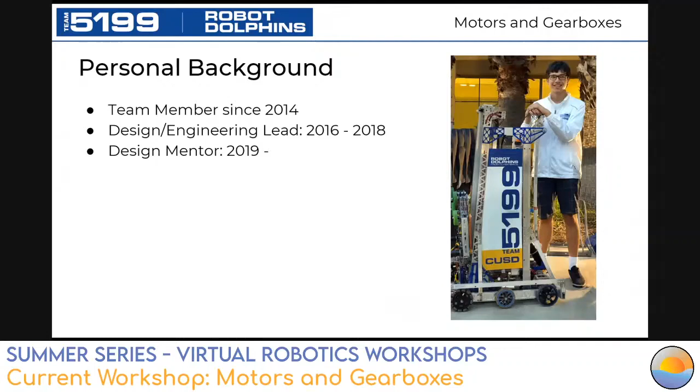I tend to do kind of a seat-of-the-pants design philosophy in a lot of ways, just because we have such a crunched design season. But this is just my perspective on the ways to design and spec your gear ratios and motors.

So I guess we'll get started with the basics, just to quickly make sure everyone's up to speed. I'll have questions at the end. I tend to move kind of fast, as you can already tell, but if you have any questions, please put them in chat, and I will try to address them as they come up, or at the end as well.

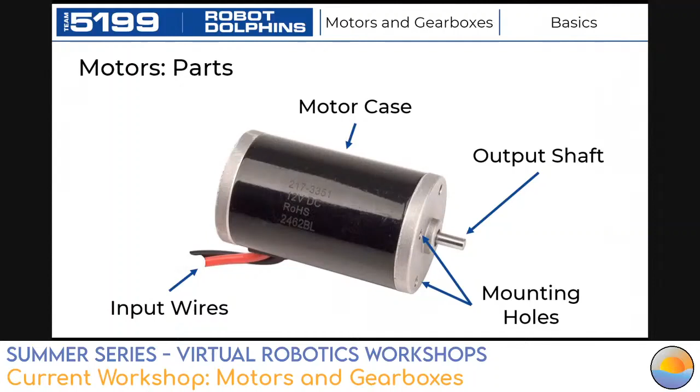So this is your basic motor. Input, you usually have about 2 input wires, your output shaft, and your mounting holes.

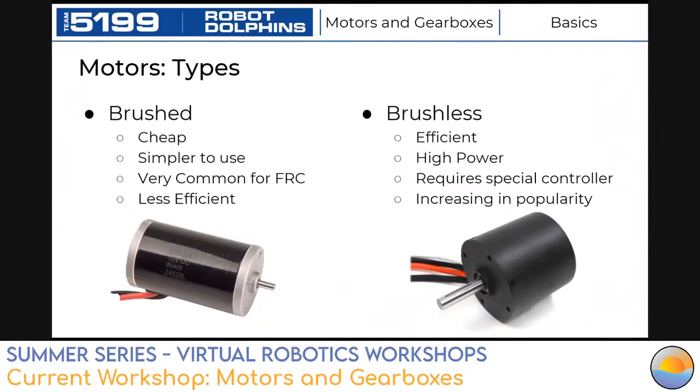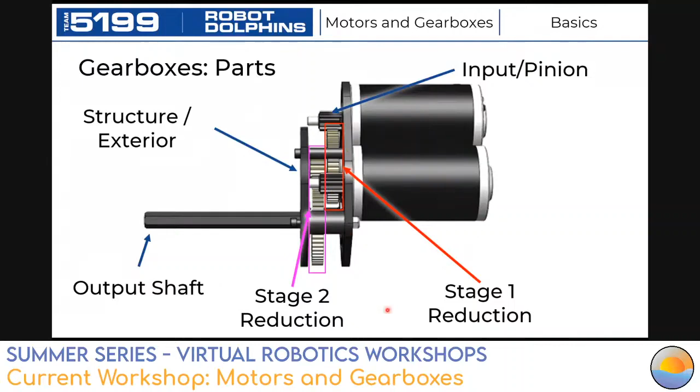So a common question I get from people is, why gearboxes, right? We have these electric motors, they're relatively powerful, so why do we need a gearbox?

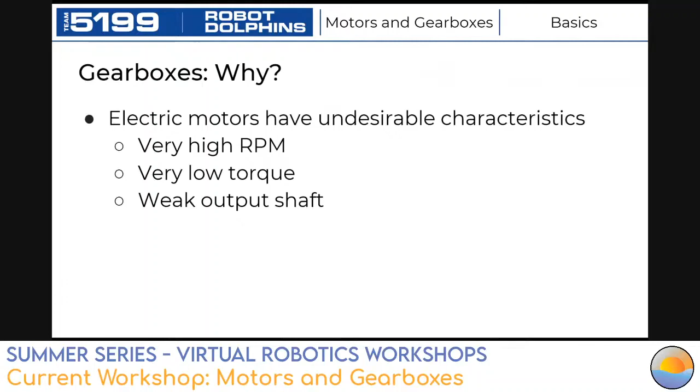Well, electric motors in and of themselves usually have very high RPMs and pretty low torque at the actual output shaft. I don't know if anyone's ever taken a raw electric motor, but I wouldn't recommend doing this — you can actually stop it with your hand fairly easily with a small handheld motor. But you put it in a gearbox and it becomes much more powerful, much more usable. Additionally, the output shaft is usually relatively small because the motor itself is fairly small, so it's kind of hard to mount to that.

So in actually doing your gearbox, gearing is actually relatively simple. It's just based on the ratio of your small gear to your big gear, of the gears to themselves. They can be thought of essentially as circles of 2 different diameters, so when you put them together you get this ratio effect of the small and the big. Actually, very old reduction systems involved just 2 friction surfaces that were circles rolling together. Teeth were added to prevent slippage and allow you to transmit significantly more torque.

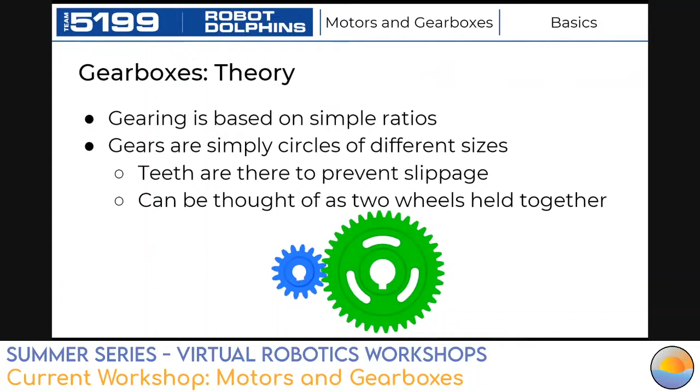Moving on from there, you can see that the gears themselves have different circumferences. This is what's called a pitch circle, and this is kind of like the midpoint, the point where the 2 gears are tangent to each other. This is equal to your gear ratio, right — your radius is related to your circumference, so your circumference and radius combine and they equal your gear ratio.

And you can see this small gear would have to move 2.375 times to match the distance of the green gear, the big gear, which means that this green gear will move 2.375 times slower than whatever your input is. So your output shaft moves slower than your input shaft because this needs to spin more, go farther than the big one, right? And so this is what gets you your speed reduction.

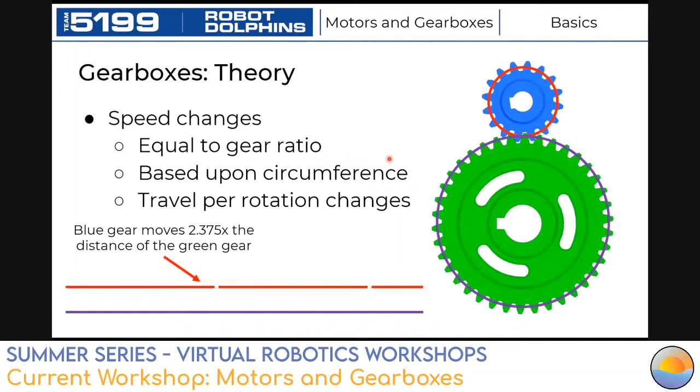Now, most of the time, speed reduction is kind of a byproduct to what I see as the ultimately more important part of a gear system, which is your torque change, right?

So a gear, you can kind of think of it as two different levers, right? Because torque is just a force at a distance from your rotation center. So if you have a small lever pushing on a bigger lever, you get more mechanical advantage from the input shaft on the smaller gear to the output shaft on the bigger gear.

And of course, this works in the other way as well. If you end up gearing to increase speed, you lose torque because now you have a longer lever pushing on a shorter lever, right? So you lose that mechanical advantage here. And so this is one of the major advantages to having a gear ratio at all, is that you can actually take these high RPM but very low torque motors and change them into a slower RPM but significantly higher torque output. And that's kind of the whole idea.

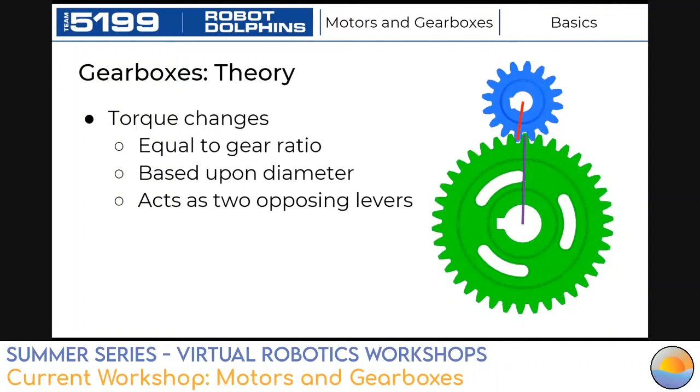So the key idea when thinking about gearboxes is power in and power out. This is what I found was the most important thing when I was learning. I was thinking, how do these small motors work? Why can't I just use a tiny motor instead of a big motor, right? If anything can be geared to any torque, right? Because theoretically, any motor can produce any torque as long as you gear it enough.

Well, no matter what, the smaller motor will always have less power, right? So power in equals power out is one of the most important things, because you will never get a small motor that is extremely fast and has high torque at the output of your gearbox. You have to sacrifice something, right? There's no free energy in this equation here.

So if you have a bigger motor, you can gear it down less, you maintain a higher speed while also outputting a similar torque. We'll go into this a little bit later in the presentation when we go over actually looking at calculations of the gear ratios. But yeah, the main thing is, there's no free energy in this equation. A bigger motor will always have a faster and higher torque output.

Ratios are easy to calculate. Like I showed before, it's just a ratio between the input gear and output gears. So if you have a 20-tooth input gear and a 40-tooth output gear, 40 over 20, that's 2 to 1. Your speed will be halved because you divide it, and your torque will be doubled because you multiply it.

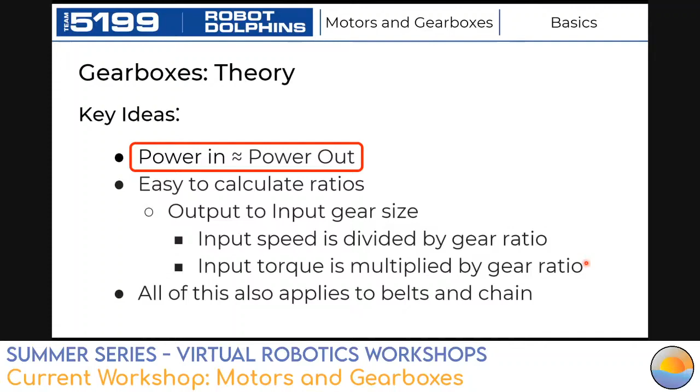So what are your options when you're designing a motor for FRC, right? Well, there's only a select number of FRC legal motors. These motors are defined in the rules. It makes your life both easier and harder, I would say, because you have less of a selection, which puts you in a difficult position because some of the motors, you have gaps in between power levels and sizes and things. But it's also easier because you don't have to wade through a million different motors to find the one that you want.

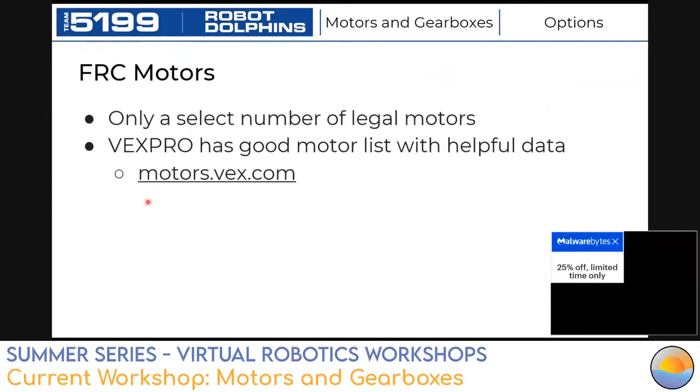VexPro has a really nice list with really helpful data. You can find that at motors.vex.com. I would say that's, when you're designing a motor, a one-stop shop, very easy, especially if you're buying your motors from Vex. They give this very helpful list. You can dive into each of these motors. They have really helpful graphs that we'll go over later. But yeah, we'll come back to that later in the presentation.

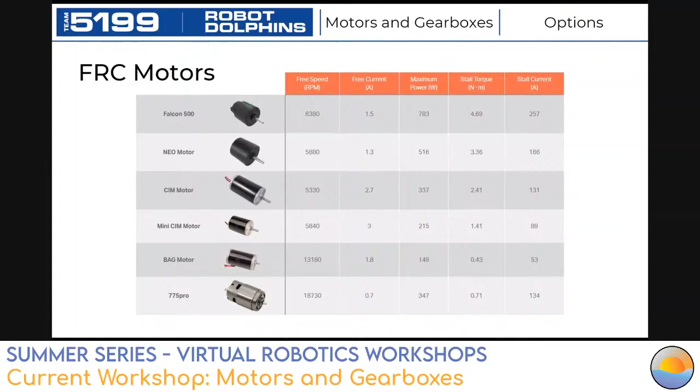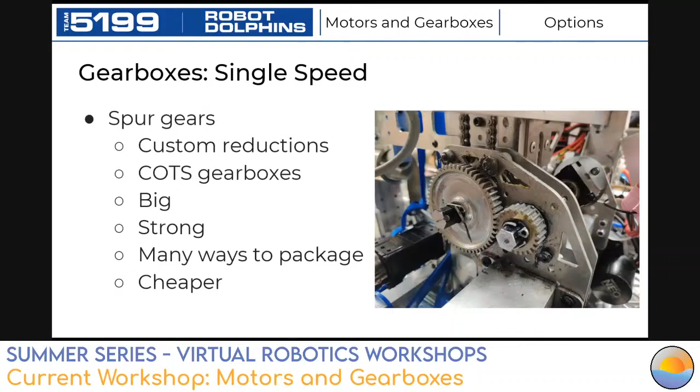It's easy to make custom reductions. Like I said before, the ratios are just equal to each other. Many COTS gearboxes come with this. These gears are usually fairly large, but you make up for that with their high strength. They're relatively easy to package. I mean, this gearbox here, you can see it's just 2 shafts on a plate. And they're often pretty cheap because they are such simple two-dimensional shapes.

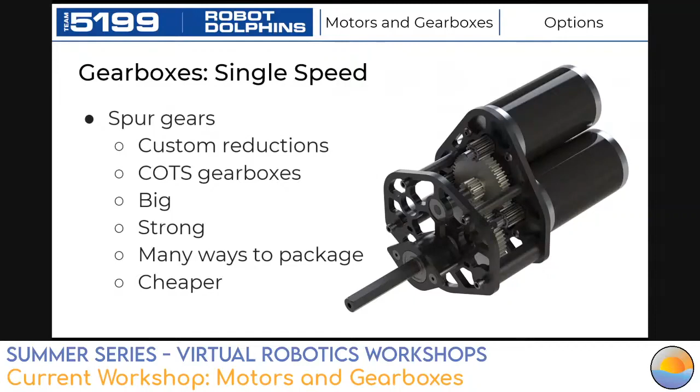You can buy a lot of pre-made gearboxes with this configuration, where you have your pinion gears as the one I showed before. And yeah, these are usually the more common option when you see teams make their own custom gearboxes. But if space is at a major premium, planetary gearboxes offer a couple distinct advantages, but also a couple drawbacks.

The main advantages are they are extremely small and extremely low weight while being dense, because you have a reduction that happens using this planet and sun system. I'm not going to go into that a lot right here, although I would encourage looking a little more into the theory and calculations behind that if you want to later.

But it's a very neat system that gets you massive reductions in a small space. In the same space, you can get a 3-to-1 reduction. You can also get a 10-to-1 reduction.

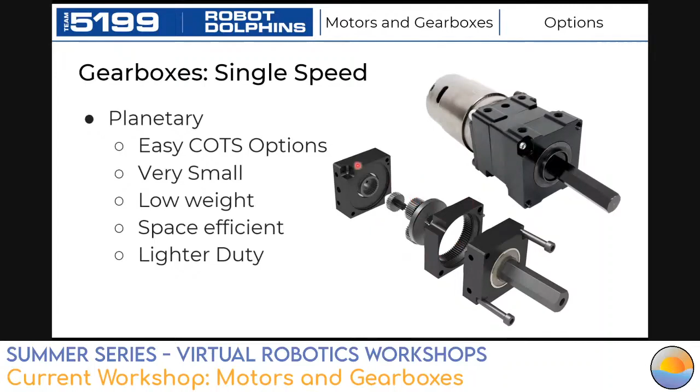But because of this, they are lighter duty, while you do make up for that with their space efficiency. But I wouldn't recommend using these for anything that has a high kind of impact output.

And because you can see, they have a lot more moving parts and a lot of small shafts in here that couple things, and just the movement is a lot more complex, so they can be significantly harder to repair if they're repairable at all.

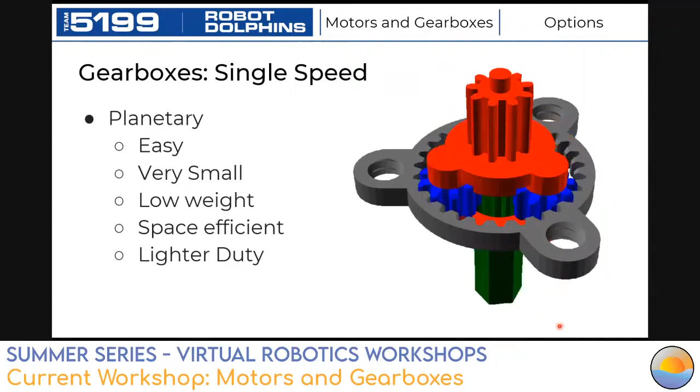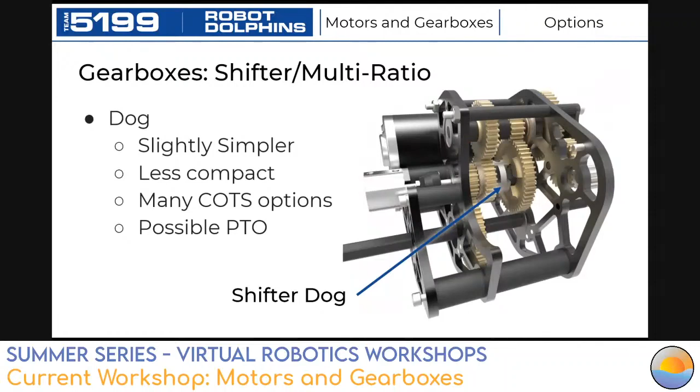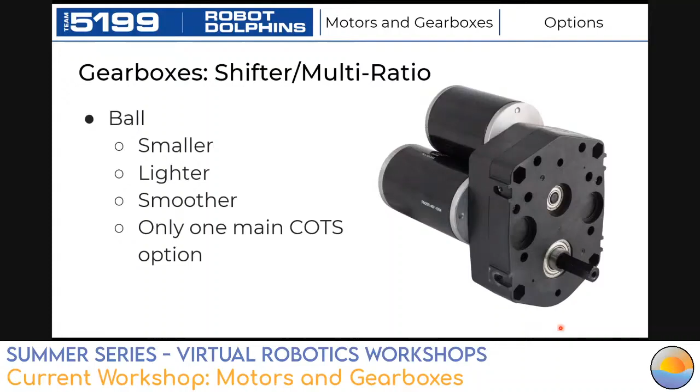Okay, so the kind of meat of the presentation here are the design considerations. So once again, if you have any questions, make sure to leave them in the chat, and I can come back or I can slow down. But yeah, this is the most important part for sure.

So the first thing to do at any state of the design process, and especially for gear ratios, is to define your loads on your mechanism, right? So in this case, what's helpful to have are, say, the length of the arm that you want to drive, or your drive wheel diameter and the weight of your robot if you're doing a drivetrain, or the pulley diameter if you're doing an elevator or climber if you're using like a rope system.

These are all needed to calculate the gear ratio to find the force needed or the torque needed to properly move your mechanism, right? So torque is very important. Without torque, the robot will not move, and I'll go into that a little more in a second.

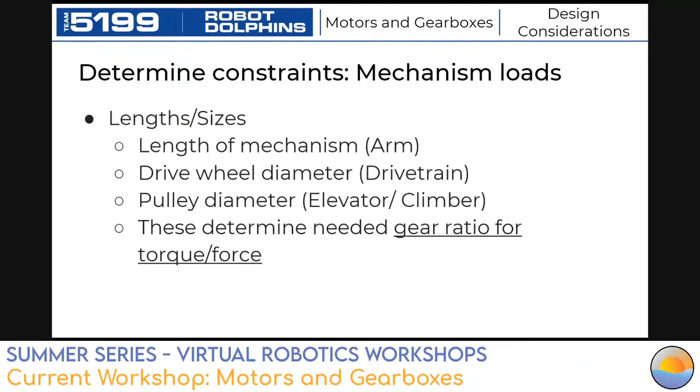So speed is the other option, right? So when you pick your gear ratio, you're balancing your desired speed and your needed torque, right? So what's interesting about this is speed, while it is really important to have a high-speed mechanism, we're in a competition scenario. If a mechanism is geared for too high of speed and doesn't have enough torque, that mechanism will never move at all because the motor will not be able to move your load.

So if it's the choice between having the speed you want and the torque you need, you always have to pick the torque you need, because if there's not enough torque, the mechanism simply won't move at all, and that speed will essentially be unusable.

So, in this case, oftentimes, the team will decide a target drive base speed or a target elevator speed or an arm speed, and you will base your calculations off of all these in the future. So it's good to know what kind of your goals are so you have something to shoot for when you're designing.

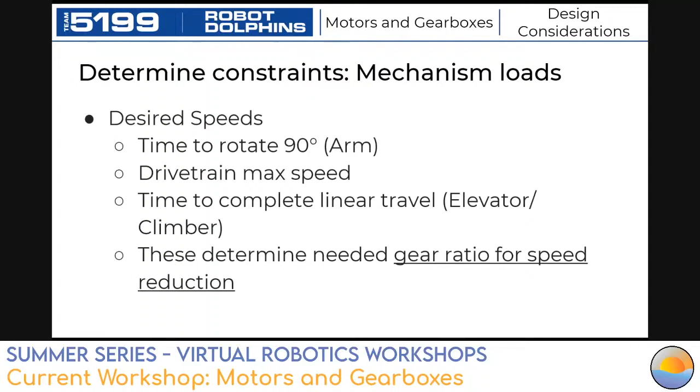In terms of weights, you want to take into account everything that you can foresee, not only the game piece, but also the mechanism, how much safety you want to give it, in case you might accidentally have a second game piece that you need to move out of the way, your robot weight, robot weight with pushing another robot, all kinds of things like that you want to make sure you consider.

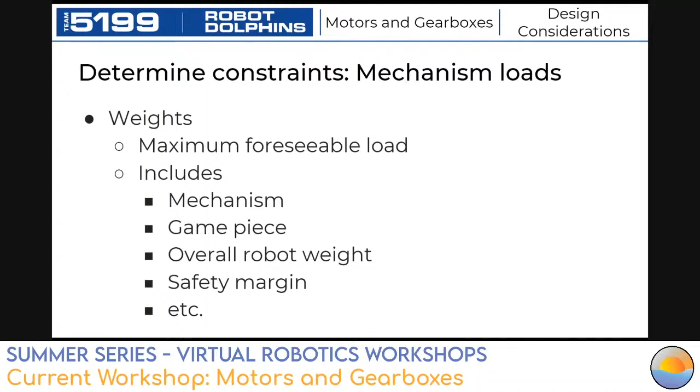Something else that's important is kind of just general stuff, wear and impact. These can really determine which types of gears and gearbox you want to use. Like I said before, the planetary gearboxes, small and light, but also easily breakable and almost impossible to service on the field. So you want to take that into account when you're designing your gearboxes.

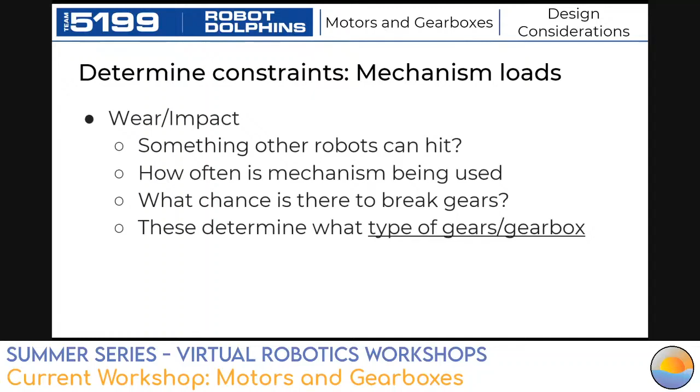Same thing, you balance between the space you have versus what you need. Sometimes you have to go back and make sure your thing not only fits, but also won't break on the field.

Something that's nice is almost all motors and off-the-shelf gearboxes have CAD supplied, so make sure to use those when you're actually designing. A lot of times you design your mechanism and think, okay, I'll just put the motor here. But you want to make sure you actually put that motor in CAD in your design, draw it out at least in 2D, and make sure you can get enough space, especially if your motor is moving on, say, an arm.

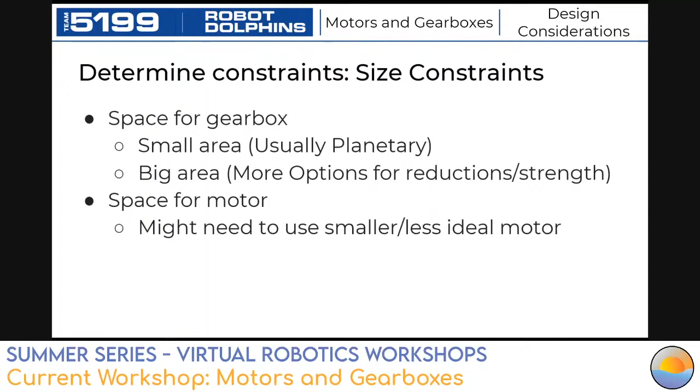There are many different motor sizes, and a lot of motors are radically different sizes but have the exact same power - power in, power out. You have to figure out whether you'd rather use the larger motor and have a little bit easier gearing, or use the smaller motor. It really depends if it's in a weight-critical place. This is really where your job as a designer comes in, to figure out what is ideal for your situation - it's on a case-by-case basis.

I'll show a calculation later using a calculator where you can really see the difference between a small high-speed motor and a large low-speed motor that have the same power, and what kind of difference that makes for your gearbox.

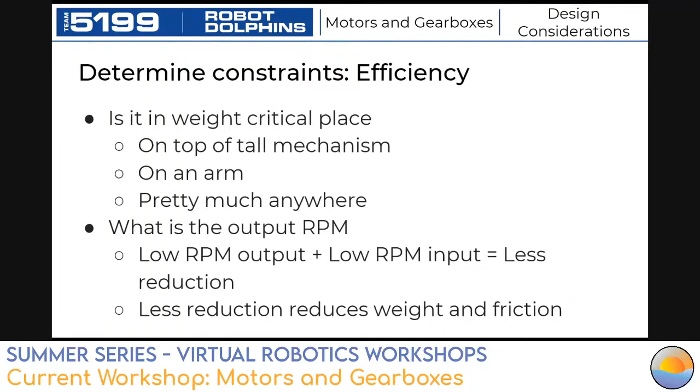Okay, so the most important part - I think I said that before, but this is definitely the most important part of the presentation. If you take nothing else away from this meeting, you definitely need to check out the JVN design calculator. This is made by, I believe his name is John V-Neun, he's from the Robowranglers. He has a great calculator - it's completely invaluable. It is the most important thing you could ever use when doing these quick iterations and calculations.

It has lots of tables in there for all kinds of different stuff. You really don't have to dive into the theory right away if you don't want to - you can just get an answer if you need one quickly. But once again, I would encourage looking into the theory because it helps understand these calculations a bit more.

To find this calculator, it's usually best to just Google 'JVN gear ratio design calculator,' because he does tend to update it as new motors come out, and especially recently as we've been having an influx of new brushless motors, he can usually add those or update them.

So I'll go into how to use this calculator right now. It's very simple, but I'm just going to provide an overview and then my process that I use when using the calculator.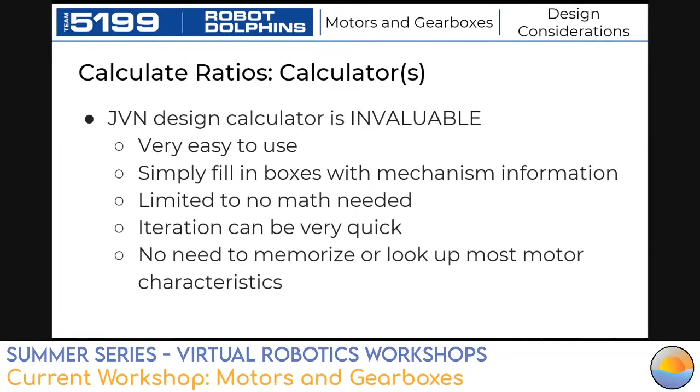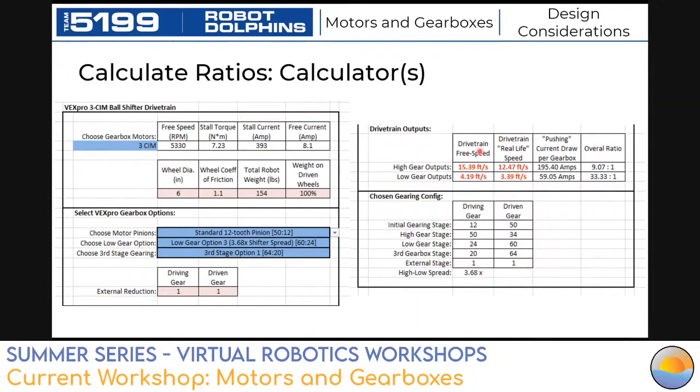Another thing that's nice is you just look up motors once - if you need to add a new motor, you can put them in here and see all of these. You don't have to go to the website every time you want to see the motor specs themselves; they're all contained in the calculator. So as new motors are added throughout the season or between seasons, you can easily put them in here and they'll pop right in and all the calculations will be done for you.

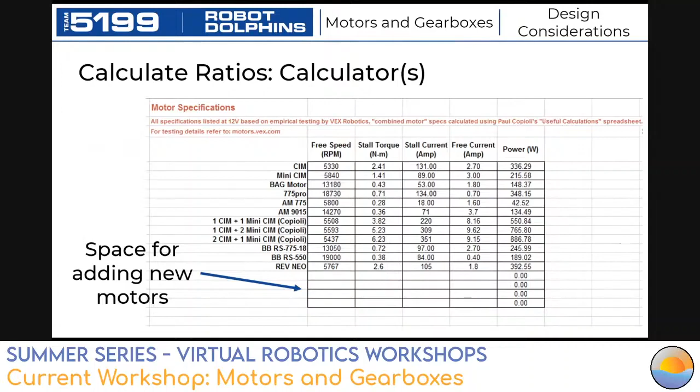Now we get to the part where you decide which motor is actually good for your particular application. This comes from the outputs that it gives you. You have to verify the outputs and make sure it has your desired result.

You can see here the outputs look the same for most of them. They have a drivetrain output showing your drivetrain's free speed. This is showing for a 2-speed gearbox with your different ratios here, and shows your expected robot speed. And then also for something like an arm or a linear mechanism, you can see what your max load will be and what your current draw will be.

Something to keep in mind when you're reading current draw or stall load is that there are breakers on the robot. If you see this number is over, say, 40 amps for the large breaker, you will end up blowing your breaker if you're constantly loading at 40 amps. So you have to keep that in mind when designing your gear ratios - while the motor will technically work at those, it may end up being detrimental to robot performance.

Additionally, the stall load is where your mechanism stops moving at all. So if you see the stall load is 28 amps at 754 pounds, that doesn't mean it runs at 754 pounds - 754 pounds is where your motor will simply stop moving and the whole mechanism will stop. Your actual load should be much less than the stall load you see here. If it's too close, you run the risk of any extra loading causing your mechanism to stop, or even burn out motors in some cases.

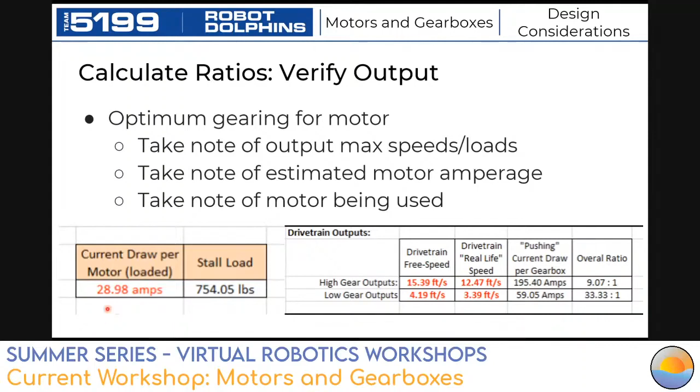So how do we actually determine what this current draw means for each motor? That is done through something called motor graphs. Motor graphs are relatively important to read, but often aren't brought up when first designing motors. They really give big insights into motor performance and can help you determine where you want to gear your motor, because all motors like being in a certain area and don't like being in another area, as I'll go over in a second. This can literally make or break your design.

Motors, we all know they burn out, and sometimes it feels kind of like a mystery - why is my motor burning out here? It moves the mechanism okay, but it's getting really hot. Motor graphs are a way to show you a relatively accurate representation of what your motor will be doing at any given load.

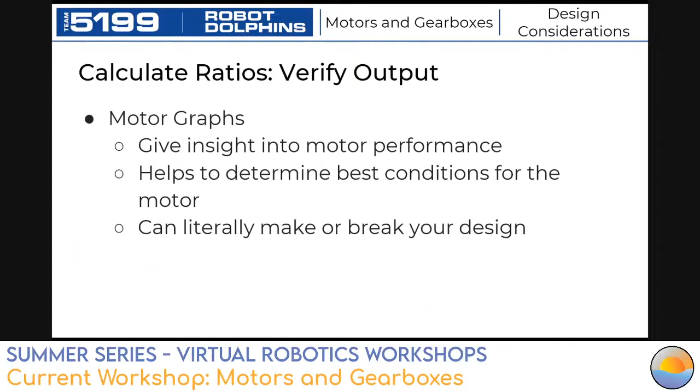To find these motor graphs, I'm going to show you how to do it through the VEX website, motors.vex.com. Often, if you're using a non-VEX motor, the graph will be given on the motor's data sheet, or they will just simply give you max power. I'll show you in a second how you can estimate these graphs based on max power itself.

Something to keep in mind here is that these are done by VEX, so there are some non-VEX motors on here, like the Neo motor. You'll see slightly different numbers based on where you get your sources from, so just keep that in mind. It may be a good idea to take an average of those.

For right now, we're going to go over the 775 Pro motor, just because it's an interesting motor to look at, and they have a lot of good data on that motor.

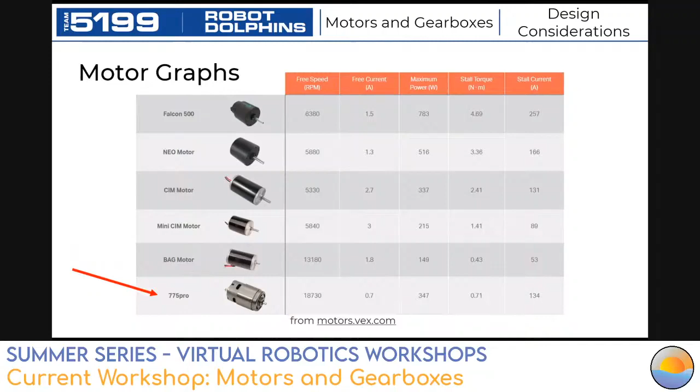When you're on motors.vex.com, you will see the 775 Pro, and if you click on that, it'll open up a page with all sorts of information. It'll show you the information they found from their testing - the basic information showing max power, current and stall current and torque, and then the actual motor graph itself, as well as some other helpful information. This is kind of outside what we're talking about here, but if you're wondering why the 775 Pro tends to burn out easily, these graphs are helpful to find out that information.

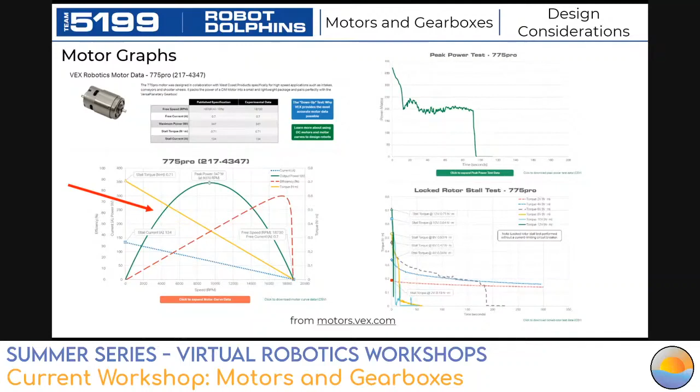But the motor graph is really what we're going to concentrate on here. If we zoom into that, you can see it consists of lots of different lines - essentially 4 different graphs on this one graph. Efficiency is the red dotted one. I usually don't worry too much about that, just because we'll usually be operating in this region anyways, as I'll explain in a second. You can see that current is highest when your motor is locked, and your stall torque is also highest when your motor is locked.

Your output power increases until about the midway point and then decreases as you get up to the highest RPM zone. So what's interesting is, if I run my motor in this region or in this region, it'll have the same power at any given point, because it's a parabola. So which region do I want to be in?

Well, if you take into account current, you can see that this zone is a lot safer for the motor than this zone over here. So if I'm running the motor at, say, right here, this looks like about 300 watts of output power at about

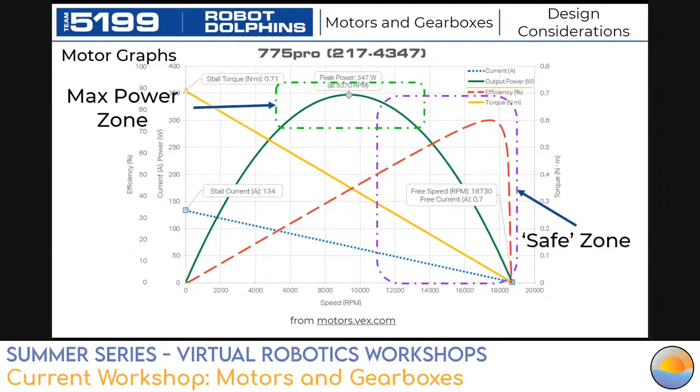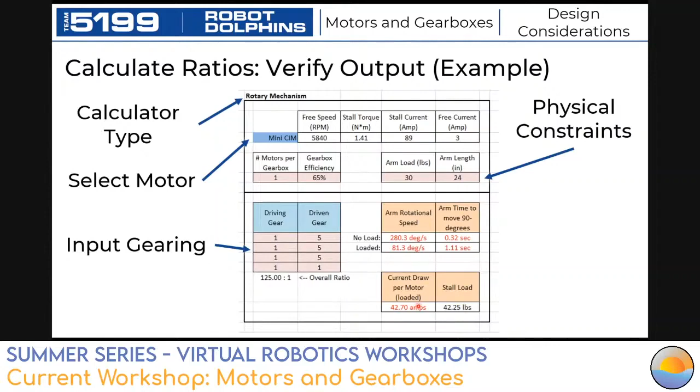Okay, so let's say you want to verify your output using this motor graph. So we'll move into the calculator again. You put in your physical constraints, make sure you're working on the right calculator, put in your motor, put in your gearing, and then you'll see your output right here. These are your most important parts.

So if we zoom into those, you can see here, okay, here's your current and here are your speeds, and your load. These are usually the two things you're looking at when you're actually designing your motor, your gearbox. So once again, the speeds are important, but they're usually a byproduct of your maximum load case.

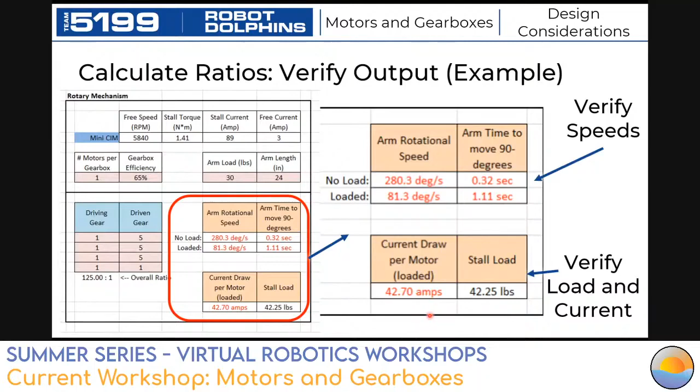So let's say we have this motor at 42 amps, and it's a Mini CIM motor. We want to see if this is in the safe zone of the actual motor itself, or if this is something that's going to burn out the motor. So we move to the motor graph and we cross-reference our amperage and our motor graph.

So if we come over here, we can see this is the current axis as well as the power axis. We'll find 40 amps, and we'll move over to where the 40 amps are on this line, because this is our current line. So we know that at 40 amps, it'll probably be running around 3,200 RPM.

And then we move up and we find that, okay, it is in the second half of the curve, but it is quite near the top. So you can imagine if a load over the one that we put in before comes in, it'll increase our current, and we'll start moving into the more dangerous zone. We'll actually start losing power for our motor.

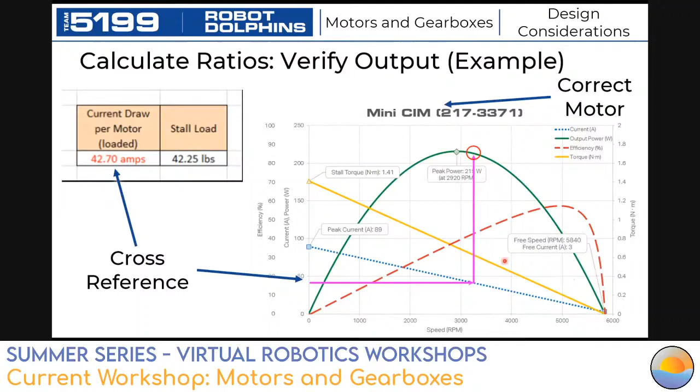So it might be better to actually gear our motor farther down on this curve, so that if a higher load comes in, we actually gain power to compensate for that load, as well as not risk burning out the motor itself. So these graphs are very important to read and are really helpful in designing a successful and safe mechanism.

This basically just reiterates what I said before, but also takes into account, if your motor's too small, you may never actually get the performance you want out of it. Any motor can operate with enough torque in its safe zone, however its speed will suffer if its power is too low. So when you're sizing your motor, you really want to figure out what your lowest acceptable speed is.

And that way, if weight is important, you can pick a smaller motor and use its power to the fullest. Whereas if you oversize your motor, you might be having something that's too unusably fast anyways, and is just increasing weight. So that's something to keep in mind when you're designing that.

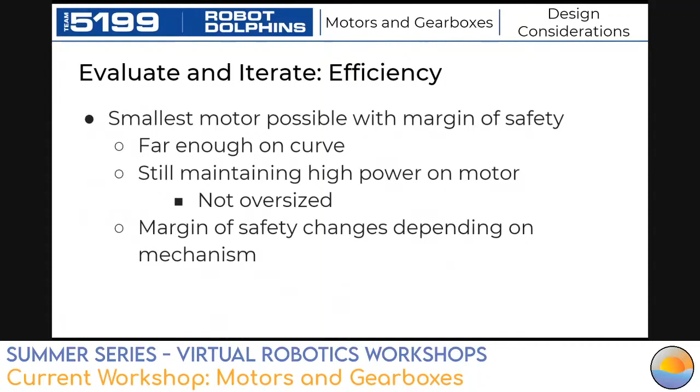Same thing with efficiency, I'll show this in a second too with my example. Your input and output RPM, as I mentioned at the beginning of the presentation, are based on your gear ratio, but they're also based on your motor. So if you have a very high RPM motor and a low RPM motor, you're going to have to gear down the high RPM motor more to get the same output speed as the low RPM motor. And that can lead to some interesting problems, because some motors have the exact same power but higher RPM, and I'll show that in a second.

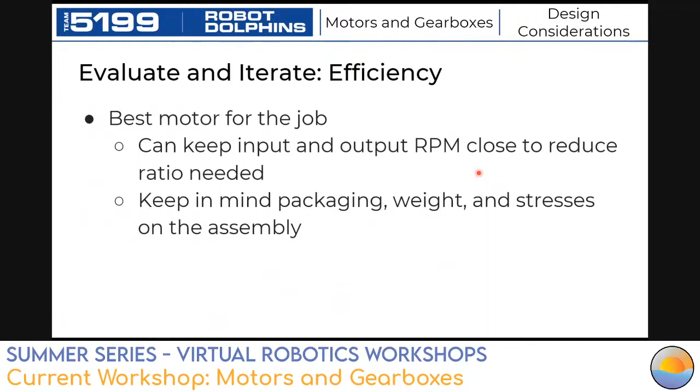Same thing with efficiency. So you want to make sure that you pick gears based on what you're working on. I mentioned planetary versus spur before.

Custom versus buyout, this is a big one. If you don't have the time or resources to design an actual custom gearbox, it can be useful to just buy one out, but you still want to know: do I want a planetary or a spur gear, and then additionally, consider the weight and strength that go along with those choices.

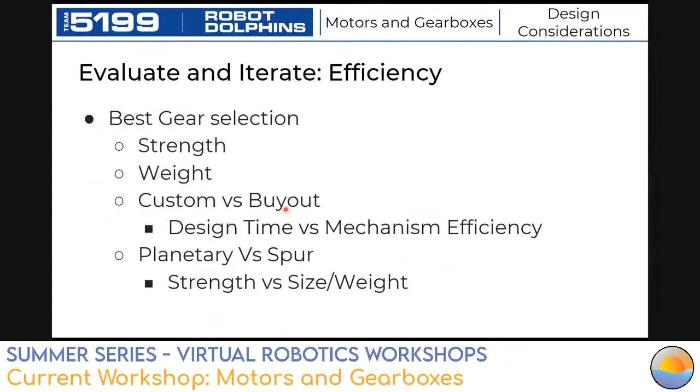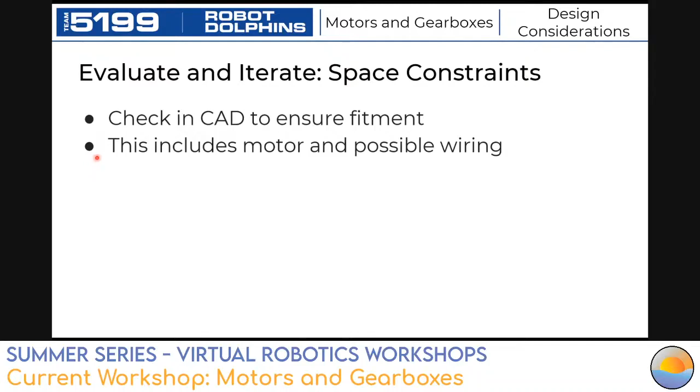Once again, make sure to check in CAD. This is an issue we've run into before on Robot Dolphins: it looks like it's going to work, everything seems like it's going to work, and you put it in CAD, and it doesn't quite work. That's why it's really important to make sure your space constraints are met when you're designing that.

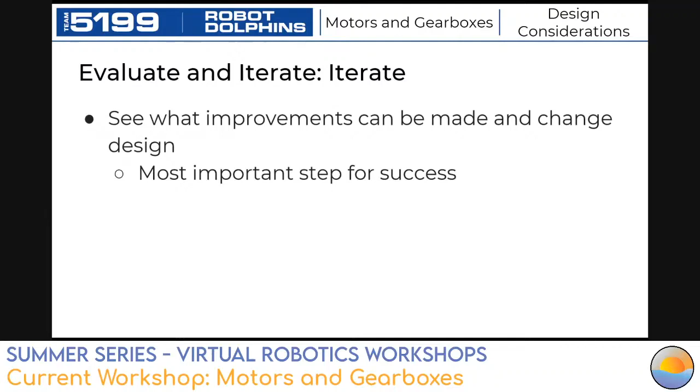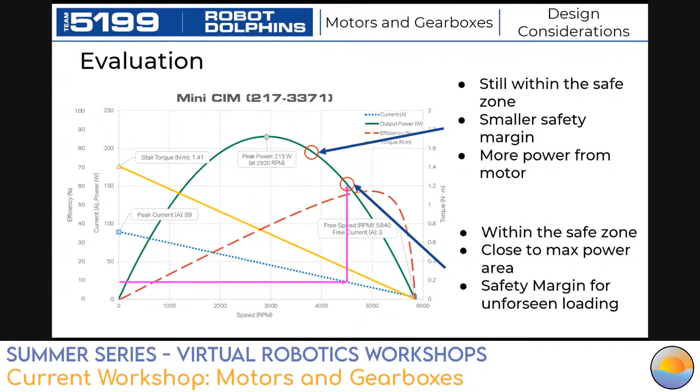Okay, so I'm going to give a quick example, and then we'll move into some questions after this. In this example, we're going to do a really simple robot arm. I'll simplify things here and say only brushed motors. We're going to use a 775 Pro and a CIM, and compare those two for this example. We're lifting a 5-pound game piece with a 20-inch long arm that weighs 15 pounds.

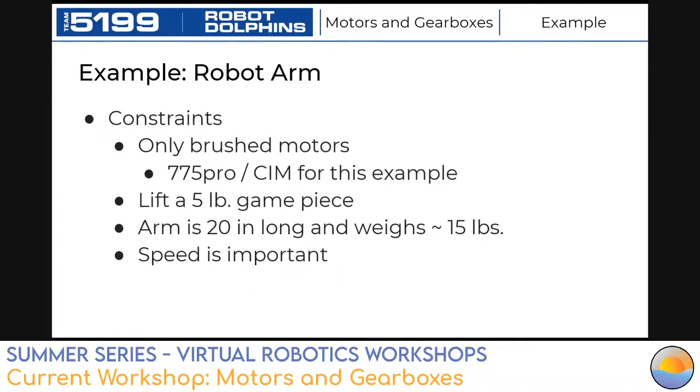We want speed to be important as always, so we'll try to maximize that. Looking at the 775 Pro and the CIM, the sizes are kind of deceiving here just because of the picture, but the 775 Pro itself is a significantly smaller and lighter motor than the CIM. You can see this reflected in the free speed—this is a significantly higher speed motor, it has a lot less inertia on its rotor inside, so it spins up a lot faster. Whereas the CIM motor is a lot slower, but it has a higher initial torque. But what's interesting to note is that while these motors look massively different, their power is almost exactly the same.

They're within a couple percent of each other—this is only 10 watts more than that. So it's interesting to note, looking at maximum power, what is going to be the difference in these motors when you're actually designing your gearbox?

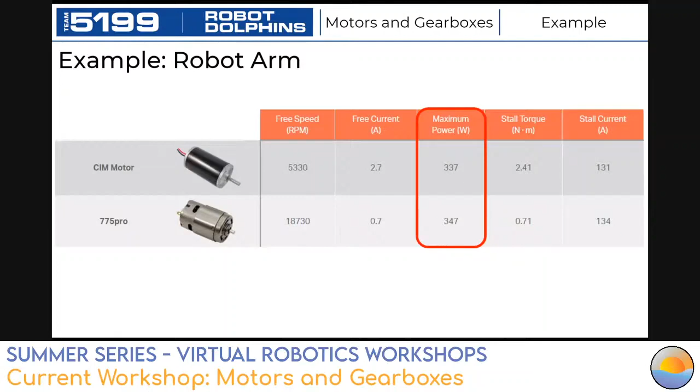So we'll plug it into the calculator. You see when you plug it in, you just select from the drop-down menu, it puts in all the information here, and you can see right away why we need a gearbox: the stall load for this thing with our arm length and arm load will only be a fraction of a pound, because of the torque disadvantage from the arm length.

So we need to start playing around with gearing and see what we can make happen. Something interesting you'll note is that I didn't just put 15 plus 5 here—I actually doubled that, because I'm adding a 2x factor of safety. Another thing to note is that technically, because of how the weight is distributed along the arm length, it wouldn't actually be 20 inches. But once again, for safety, I'm leaving that higher because it'll increase the load seen in the calculator and add a safety factor to your mechanism. That's something you can change if you need more accurate performance, but I like to do this just to be safe.

So you can see I've now geared these to have basically the same current draw per motor.

What's interesting to note is how much higher the gear ratio has to be for the 775 - it has to be 440 versus 135 for the CIM motor. This can be interesting when you're trying to design a gearbox because you'll probably have to add a lot of extra ratios in here.

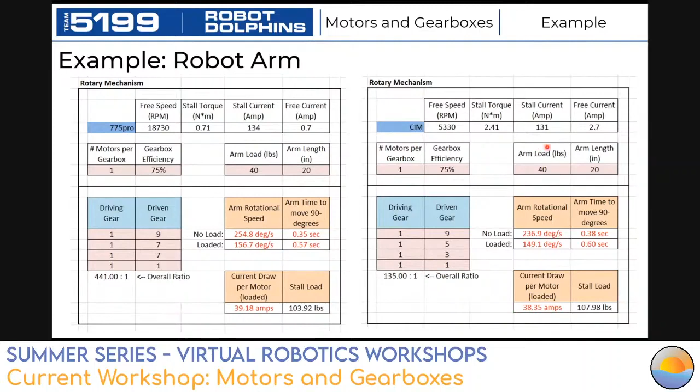So the last thing I'm going to go into here, I'll go through quickly so I have enough time for a question or two. Basically, when you're designing a gearbox, it's relatively easy to prototype your gear spacing, because gear spacing is extremely important. Gears, once again, are just basically circles, and there's a specific name for this quote-unquote circle - that's what's called the pitch diameter.

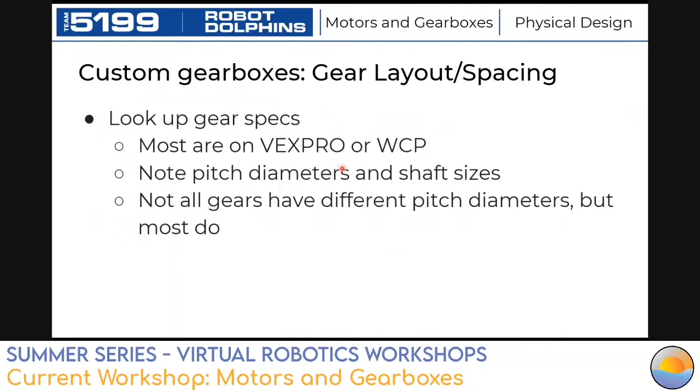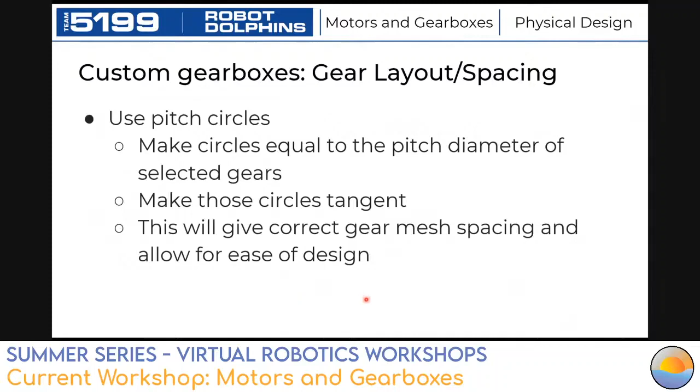You can find these on your manufacturer's website. You want to make two circles that are equal to the pitch diameter of the gears and make those circles tangent to each other. I'll show you how to do that really quickly.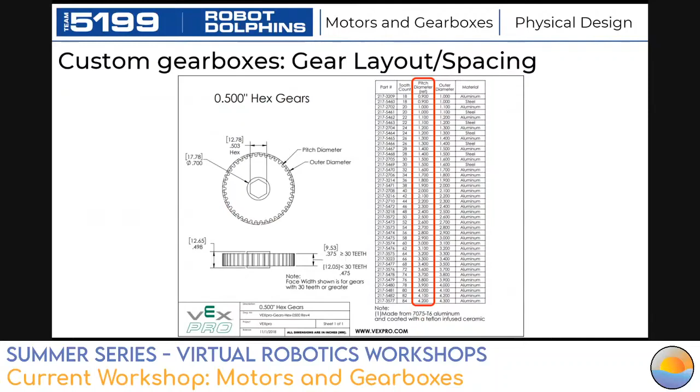So this is the VEXpro datasheet. You can see here the pitch diameters are all given - it's just the diameter of the circle. You can see the pitch diameter is represented as this inner circle here. So if I wanted to put a 20-tooth gear with an 80-tooth gear, or a 24-tooth gear with an 80-tooth gear, I just take those pitch diameters and make two tangent circles, and that gives me my center-to-center distance between those two shafts.

You just got to keep this distance rigid to each other, and that's basically how you properly mesh these two gears together. Now you can play around with different meshes to get different things like backlash or wear considerations, but for just an intro thing, I think this is the key to simply putting two gears together.

All right, so I'll answer some questions quickly so we don't run too far over time. When would you use 32 DP gears versus 20 DP gears?

So DP is your diametrical pitch. That's basically saying we have these two circles, but how many teeth - you can put a lot of teeth on here or fewer teeth, right? So with a 32 DP, you're putting more teeth per diameter increase, so your teeth are smaller. You can get a lot of teeth on a really small gear - let's say you want to put it on a 775 shaft. You can get more teeth than you'd be able to with a bigger gear, or with a bigger DP like a 20 DP, but you sacrifice strength because each individual tooth is smaller. So usually you'd use a 32 DP gear when you want a gear that's physically smaller with a smaller shaft size, but strength isn't as important.

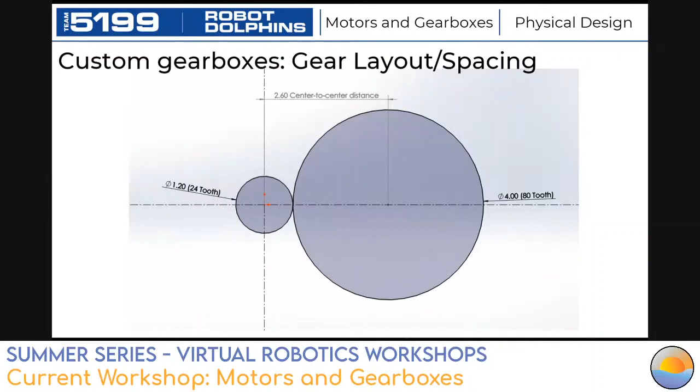There's no other questions. I believe that's it for time.